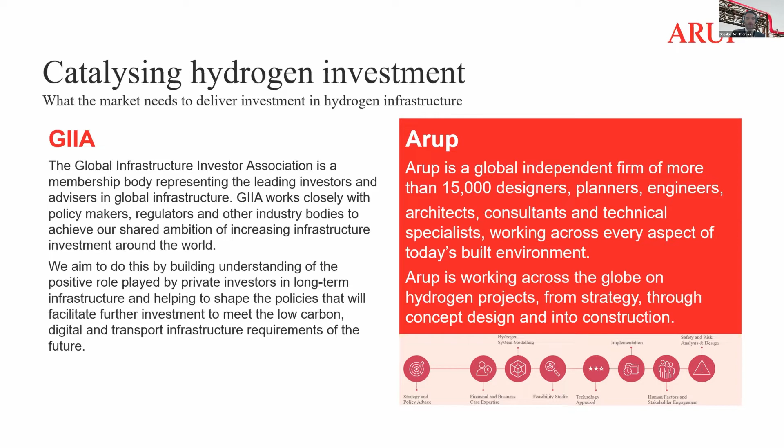Just some brief background on Arup and the GIIA. Arup provides engineering, design and strategy advice across a wide range of built environment topics, including low carbon energy solutions such as hydrogen. And the GIIA represents infrastructure investors globally, working with policymakers, regulators and industry bodies to enable infrastructure investment around the world.

So on to the report itself. First, to set the scene, we all know about the climate imperative, and it's clear and unequivocal. As the IPCC stated in its most recent report, immediate, rapid and large-scale cuts in greenhouse emissions are needed to keep within the maximum target of 2 degrees warming.

My own suspicion, having worked on this for some time, is that the need for hydrogen is probably at the upper bound of this, or perhaps even greater than that, given that the number of countries that have announced a zero carbon target is currently at 75, but who knows, after COP26, I'm sure we'll see a few more. Many of them have announced that target, and we'll see what comes from that in terms of NDC commitments.

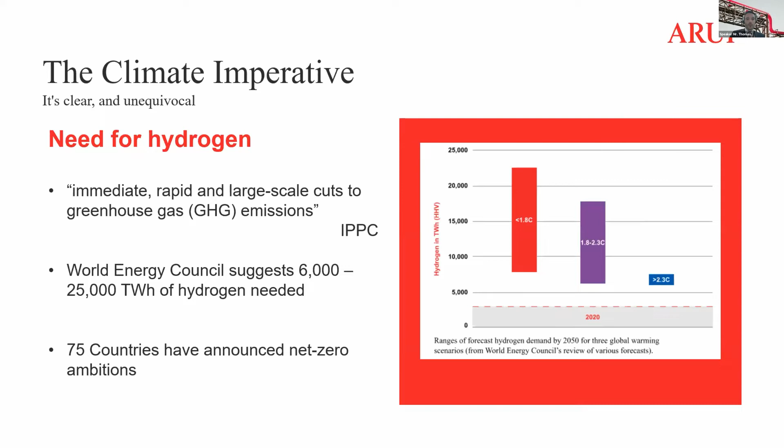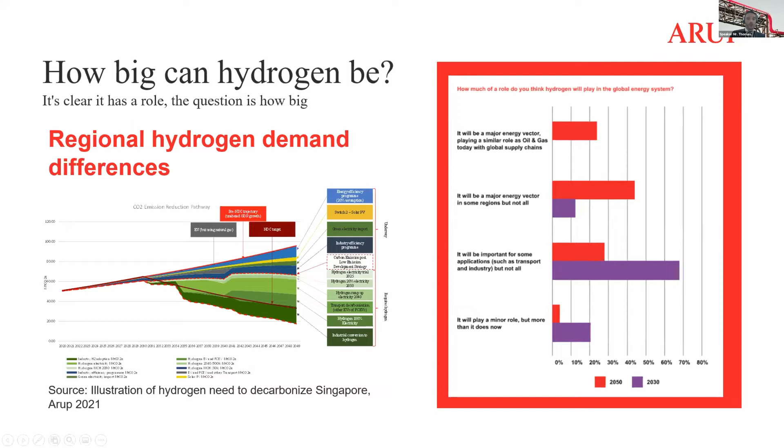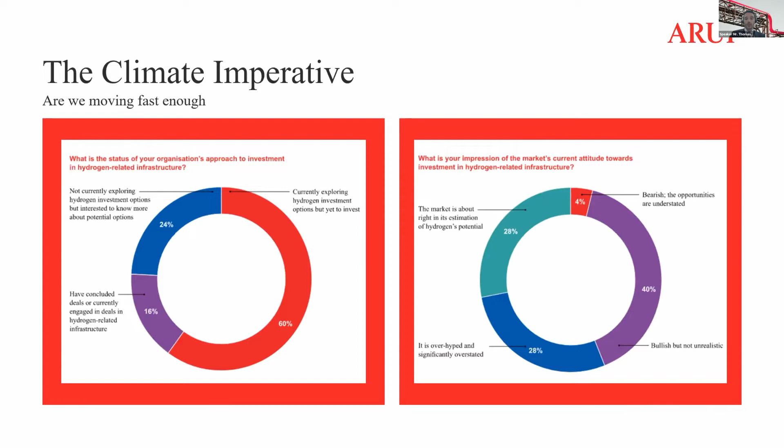The survey of GII members found that although only 16% of investors have currently concluded or are in the process of being engaged in hydrogen-related infrastructure, almost 70% believe that hydrogen will be an important part for some applications by 2030, and 90% believe that hydrogen will play some role in the energy system in 2050. This demonstrates a disparity between the current investment activity and the potential for future growth. Policy and regulatory intervention is urgently needed to catalyze private sector investment in the coming months and years if hydrogen is going to play its necessary part in the decarbonisation of the economy.

I'll talk about some of the policy and regulatory and fiscal incentives needed in the second half of my talk. But what these statistics highlight is that firstly, we have not valued carbon reduction enough to have built a hydrogen economy. The second part highlights that investors believe that in the future, hydrogen will drive carbon reduction, even if it requires some short-term incentives to getting a hydrogen economy up and running.

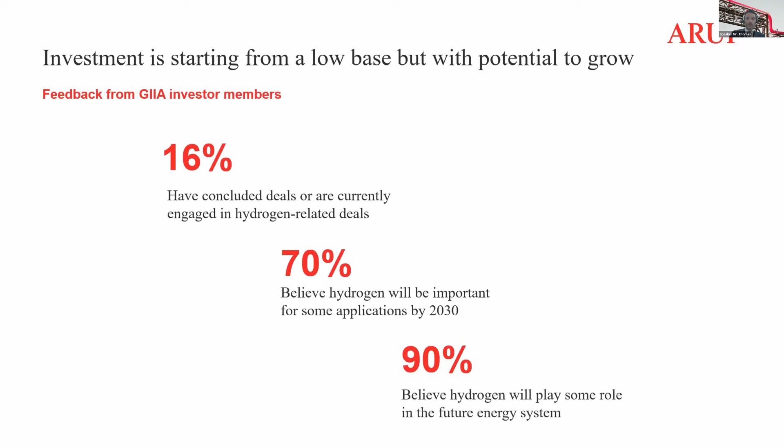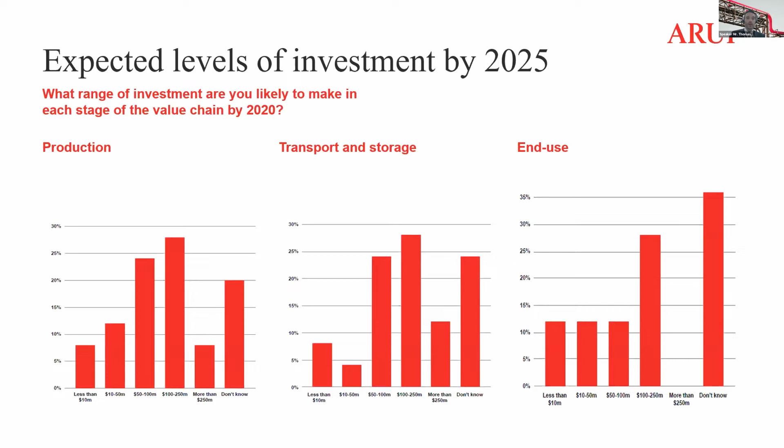So we asked investors what part of the value chain they were likely to invest in and at what scale. What we can see here is that production and transportation look to be the biggest investment opportunities for GII members. And I guess the slightly lower end user opportunities are part of the issue. Where is that secure revenue? Who's actually going to use that hydrogen? Who is incentivized sufficiently to pay for the hydrogen we can produce?

What's clear is that the total investment need is huge - 300 billion, going back to those World Energy Council estimates of what is needed to keep us under 1.5 degrees warming. So 300 billion by 2030, 1.5 trillion US dollars by 2050. To achieve that, we need more than just announcements and plans, a few trial projects. The industry needs government and policymakers to create a clear mechanism for revenue so that they can make a return on those investments.

Interestingly, investors who responded to our survey seem to think that the biggest opportunities are in Western Europe, North America, and Australia, but I suspect that's possibly a function of who responded. As we heard, there are actually huge opportunities in China from Hazel, and I believe there are some huge opportunities across Asia, South Korea being the first to create a hydrogen law. Japan, Singapore all need hydrogen in order to decarbonize their economies. And I think many other Asian countries, as they try and transition away from coal, will increasingly need to see the use of hydrogen.

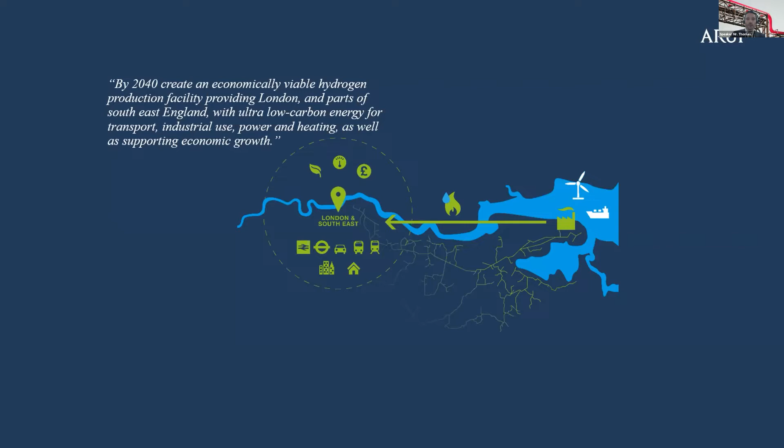So the partners have grown over the project. The project is now going into FEED studies.

In terms of the Isle of Grain, there are some specific characteristics that make it a good site. It's got excellent connectivity, extensive LNG storage, and great links to gas and transmission pipelines. There are some adjacent wind farms, but as it turns out, they are not close enough to make landing a cable for the production of green hydrogen cost competitive. There are also 3 adjacent power stations, CCGT power stations, and nearby aviation storage and distribution facilities.

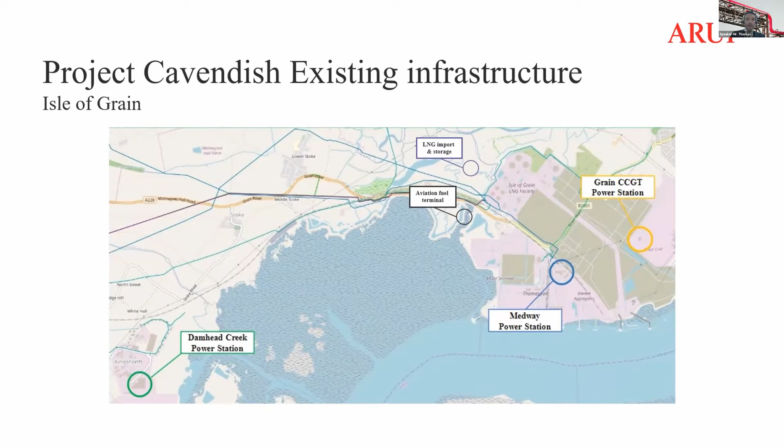There's also an existing pier currently not in use, which could be converted for the import of hydrogen, or potentially the export of CO2 if we go with blue hydrogen, which seems to be the option, and plenty of available industrial land.

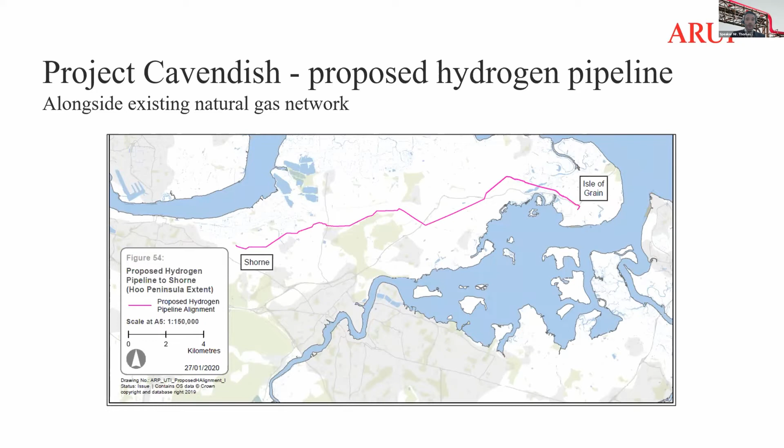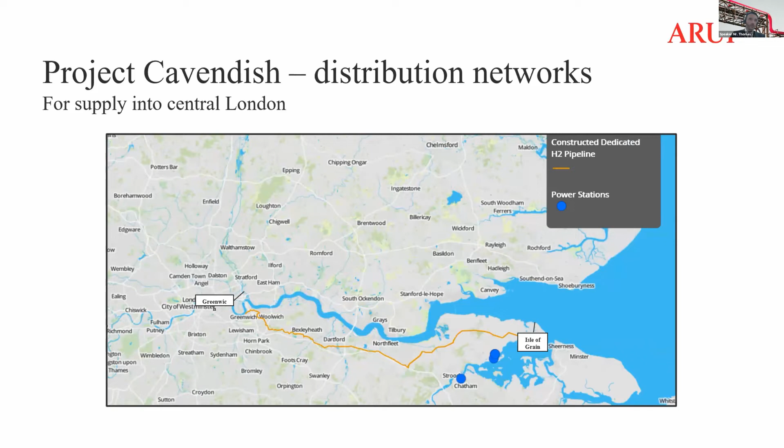In terms of a new dedicated pipeline for hydrogen, we assessed the possibility of going along the existing pipe routes from the Isle of Grain, and then the further potential of a connection all the way into London to help decarbonize transport for London, a specific very large end user in the centre.

Having concluded that direct connections to offshore wind were not viable, it soon became clear that reformation technology was much better for this particular site. With the price of electricity at industrial prices rather than green electricity, the levelized cost for hydrogen from electrolysis was actually 3 times that from reformation technology, including carbon capture and storage.

The scale of the production ambition in phase 1 alone is a 180 megawatt plant producing 110 tons of hydrogen daily. At that scale, reformation was really, in the short term, the only viable solution.

Cost calculations included the refurbishment of a jetty, the installation of CO2 temporary storage, the offload vessel for long-term carbon sequestration, and then carbon sequestration at the Northern Lights project in Norway. So we were going to send CO2 to be sequestered off-site.

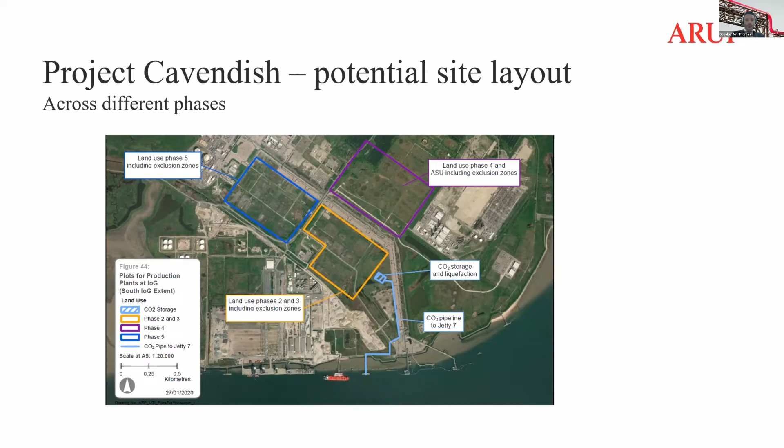Achieving this vision for a hydrogen production hub in London and the southeast of England for ultra-low carbon is a very ambitious task, and we looked at a huge program of building up the different phases so that we get to 7.4 gigawatts of hydrogen production by the time we get out towards 2040.

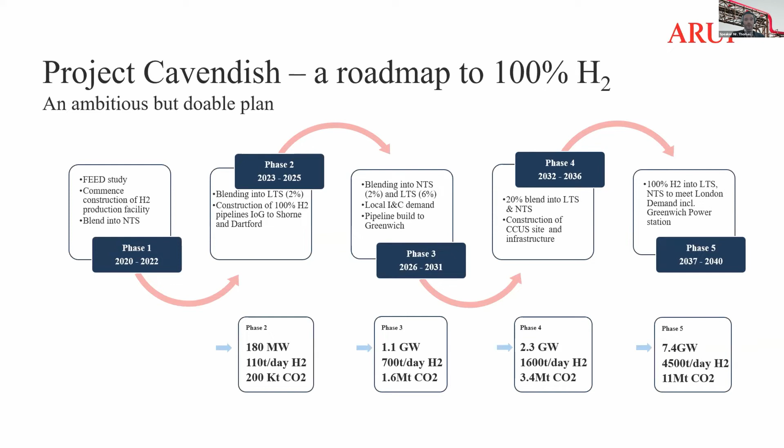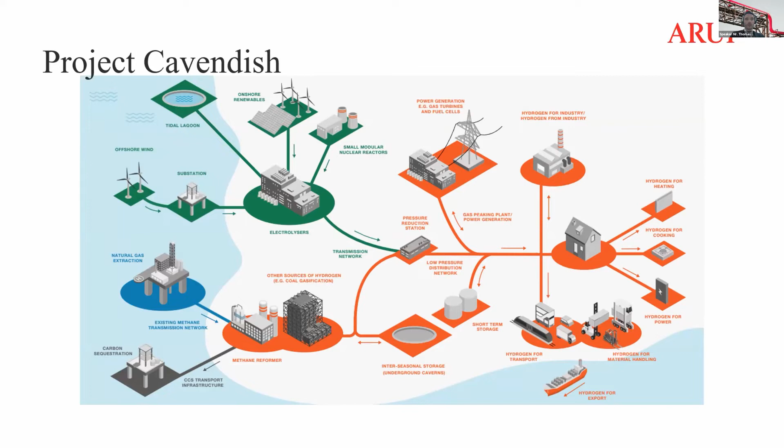Given these cost differences between what it costs normally to produce, to use CO2, to use natural gas versus hydrogen, the UK has looked at different parts of the hydrogen economy and how it could be supported, some of those mechanisms that start to create a hydrogen economy.

With regards to this project, Project Cavendish, we discovered that the additional cost of hydrogen production is somewhere between 2 to 3 UK pence per kilowatt hour. I guess that's 3 to 4 US dollar cents per kilowatt hour, depending on the mechanism chosen for funding.

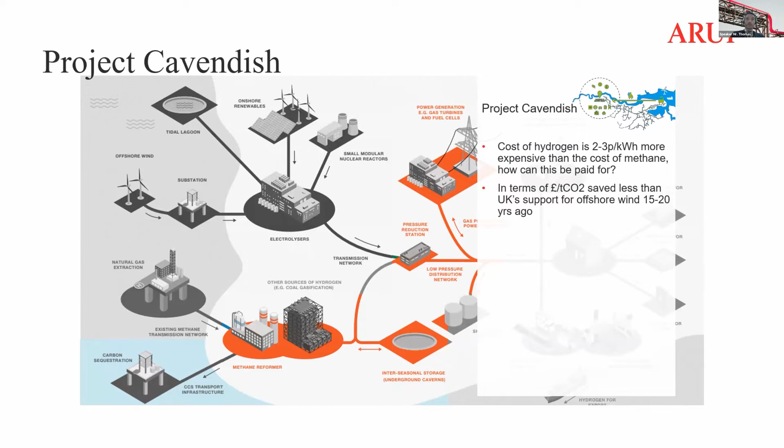But in terms of pounds per ton of carbon saved, or dollars per ton of carbon saved, that was less than the UK spent on offshore wind incentives 15 to 20 years ago. On Project Cavendish, we considered funding options to make up that difference, essentially the doubling in the price of wholesale gas, through a variety of different mechanisms.

So these 5 different mechanisms. Firstly, we looked at the hydrogen production facility, and regulatory security, probably provided by a kind of long-term feed-in tariff or contract for difference for hydrogen, could result in a fully privately funded project.

Public ownership of the plant might be strange for the UK, since public ownership of generation assets is no longer a model used in the UK, but a regulated asset model might be a compromise between the two, essentially where it's owned by the private sector for a concession period and then re-tendered out again. So that's for the production facility itself and how that could be funded.

In terms of hydrogen production, because of the ongoing cost of fuel, in this case natural gas, and the cost of carbon sequestration, some form of ongoing revenue support is needed. I suspect the most likely would be a contract for difference model, as an auction system for the price of hydrogen, since that's considered to be working well in the UK for forms of electricity in particular, but ultimately a carbon price might do the same job.

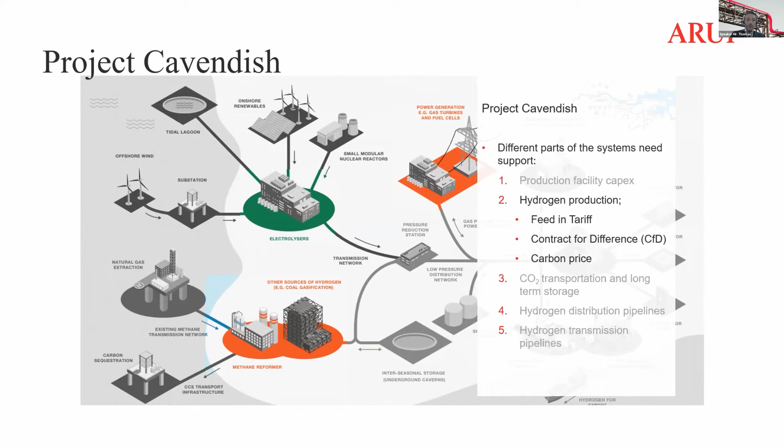And the carbon border mechanism in Europe may work for that incentive. Of course, that's currently outside of the UK, which is outside of Europe now. So other countries, a feed-in tariff may provide more certainty depending on their particular market model. What's clear is it needs revenue support.

In terms of carbon sequestration, that's an interesting one. Our techno-economic modeling assumed that a price we would pay for sequestration is somewhere between $50 and $60 per ton of CO2 that needs to be long-term sequestered. And that seems to be the price that the Northern Lights project would charge. But we didn't look in detail on this project at sequestration itself.

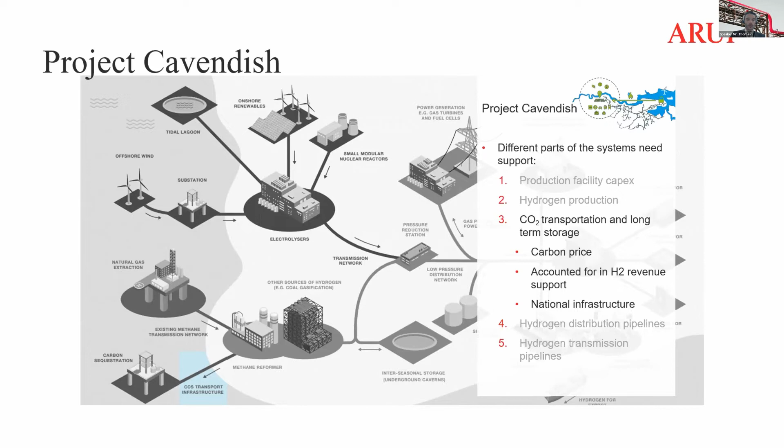Ultimately, the cost is part of the cost of hydrogen production. So again, it could be incorporated into a contract for difference or a feed-in tariff, so that the cost of long-term sequestration can be incorporated into the production of blue hydrogen.

In terms of hydrogen distribution pipelines, I think a regulated asset-based model used for the gas networks already in the UK is probably likely to be the most viable solution. And in fact, all of the partners included, all the transmission and distribution partners, included within their regulated asset base proposals to the government, because they operate the pipelines currently carrying natural gas, a sort of reopener to convert those natural gas pipelines where needed to be able to carry hydrogen.

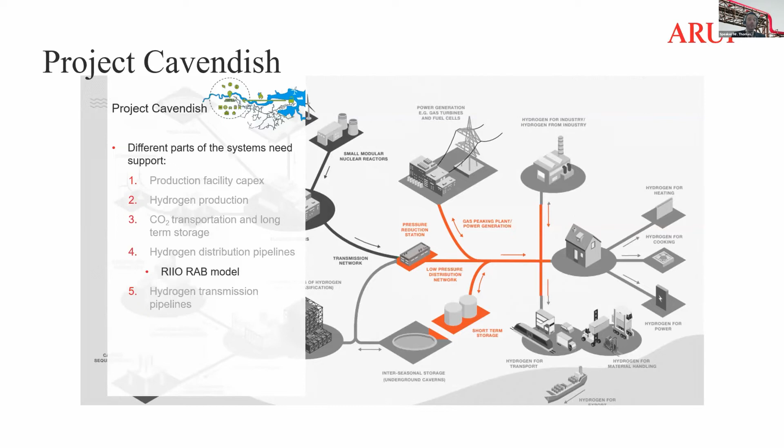As you know, there are some differences. Some pipelines would need to be upgraded in order to be able to carry the very small molecule of hydrogen versus natural gas. And it's a very similar story for the transmission pipelines.

In the UK, we competitively appoint a transmission owner through what's called a CATO model. National Grid also included a reopener in its recent bid to the energy regulator in the UK in order to be able to upgrade its pipelines and include the costs for hydrogen conversion.

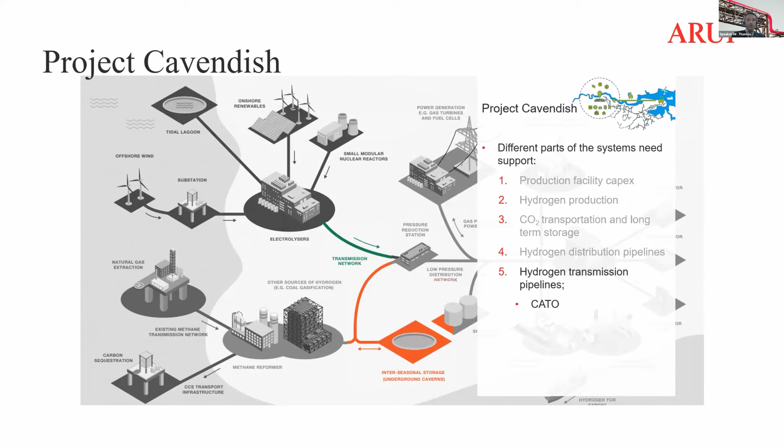So some of the key conclusions for Project Cavendish: only reformation can meet the scale and price requirements in the UK, and I think that's still currently the case in most places. Green hydrogen is still more expensive than blue, though we're seeing that fall. And as it begins to fall, there'll be a point at which the price of blue hydrogen becomes more expensive than green hydrogen.

Low carbon advanced gas reformation can achieve 97% carbon capture, but we must be very clear about this. There was some recent publication by a number of professors looking at whether blue hydrogen was actually more damaging, and they showed some graphs that showed blue hydrogen being more damaging than direct coal fired power stations.

The thing was, they took the worst case of the worst case. So they assumed fracked gas was used in the production of hydrogen and the fugitive emissions associated with North American fracked gas. They also assumed SMR, old SMR technology, which only captures about 60% of the CO2 from the reformation process, meaning 40% escapes. And in fact, we have technology now that can achieve 97% carbon capture.

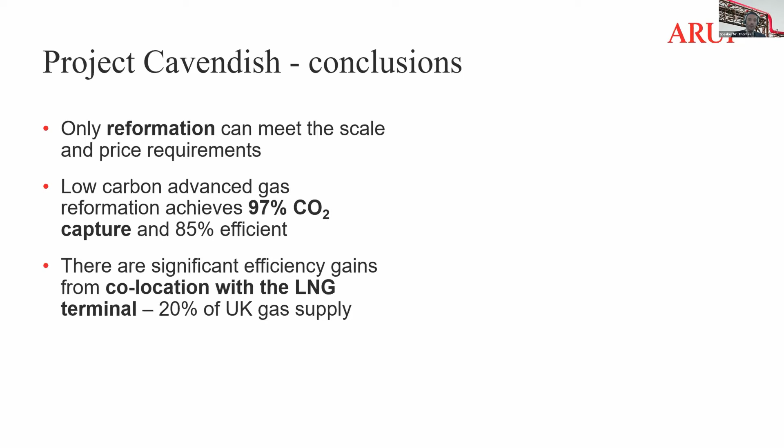There is significant energy efficiency gains to have co-location of LNG and blue hydrogen production. And in fact, in order to create green hydrogen, you split water, as you know, and that creates quite a lot of oxygen. Well, you can use that oxygen in highly efficient reformation technology to create blue hydrogen. So the co-location of blue and green hydrogen has some significant potential for the future.

Initially, we're focusing on power generation in Project Cavendish. So there were nearby assets with significant carbon reduction potential, and that would really kickstart the project before rolling out into blending in natural gas in distribution pipework.

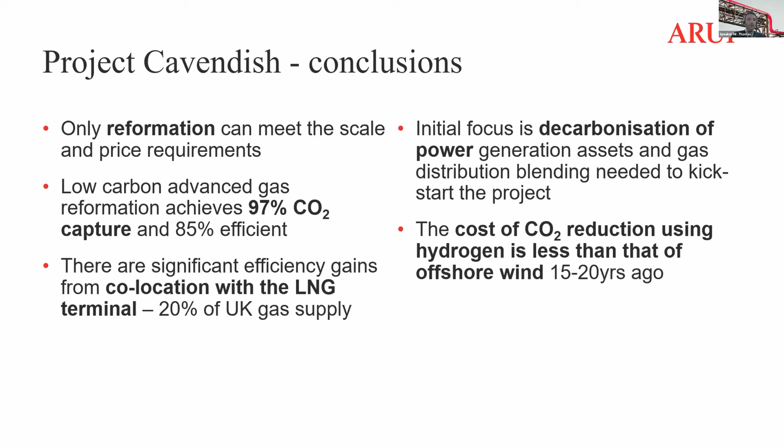And the cost of CO2 reduction using hydrogen is less than that of offshore wind. So yes, hydrogen is more expensive. We created a feed-in tariff for offshore wind. We've created a feed-in tariff for solar. Look what's happened to those prices. Hydrogen just needs the same kick to move forward.

And then finally, some form of revenue support in the form of that feed-in tariff or contract for difference is needed for the large-scale uptake of hydrogen.

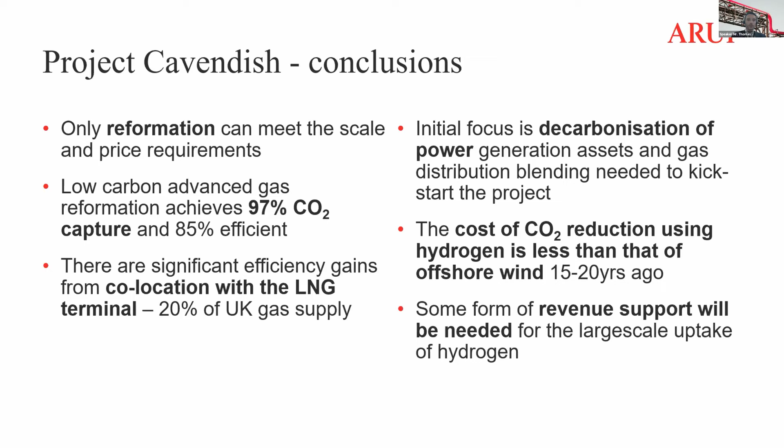So just back to finally the catalyzing hydrogen investment report that we produced with GIIA. Key conclusions for that were that if we want to see a hydrogen economy developed...

Governments and policymakers need to publish a clear, time-bound plan. They need to focus on applications with low risks for future regret, and continue to fund research and development. At some point, they'll have to choose production and importation pathways, focusing on those based on their merits. But at the moment, those clear time-bound plans are essential.

They need to develop policy mechanisms to incentivize and mandate hydrogen. We mandated the collection of waste, and used our general taxation to collect that refuse. Now it's time to do it for our CO2 waste.

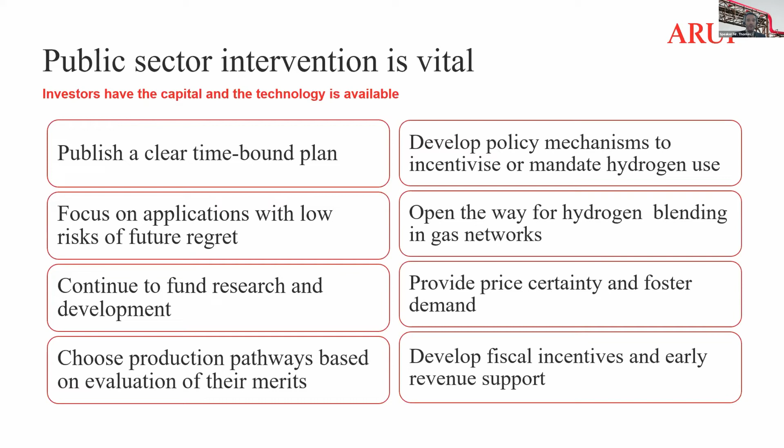We have to open the way for hydrogen blending in our gas networks. That means sometimes changing the regulations associated with those networks, and might mean paying for their upgrade. But only by providing some sort of price certainty can we get the investors we surveyed to really make those big investments. So fiscal incentives and early revenue support are going to be needed.

...I think we can leverage the vast knowledge of the oil and gas industry in helping produce blue hydrogen, using CO2 even potentially to stimulate gas extraction for those wells that we still need to tap in order to produce zero or very low carbon hydrogen.

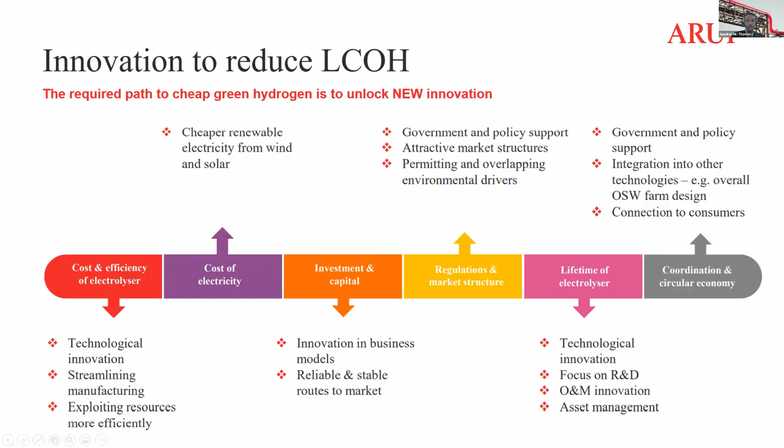So that's everything I had to present today. Thank you again for the opportunity, and I'm now open for any questions you might have.